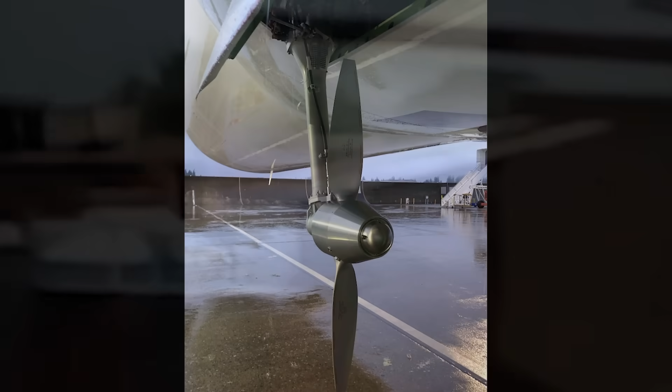With the Air India Flight 171 investigation, could inconsistencies with the RAT deployment in the government's investigation preliminary report actually exonerate the pilots from pilot error or deliberate downing of the aircraft?

Now, in order to make sure that all of the facts and figures and ideas and hypotheses all stay within the official timestamps of the AAIB, the investigative body, I want to introduce you here to the concept of the sacred timeline, which I kind of got from Marvel's Loki. And if you remember there, Loki worked for the TVA. That's the Time Variance Authority. And it's their job to make sure that nobody messes with this timeline or tries to screw anything up.

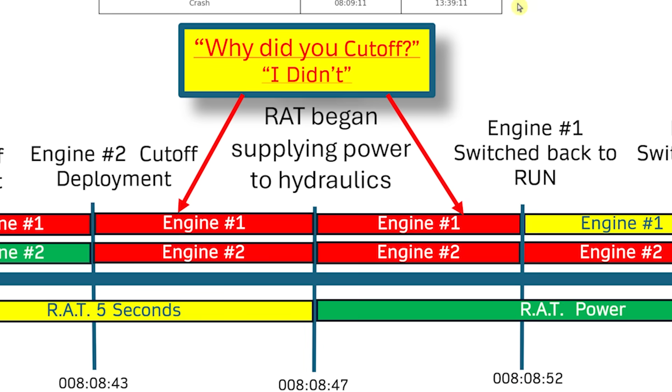Okay, so I made this chart here for you, and this is based off of the sacred timeline. Now, if you remember on my last video, I had this chart that I used, where I extracted all of these timestamps out of the AAIB's official preliminary report. So these are all of the times that everything happened. Now I want to lay it out visually for you onto the sacred timeline where there can be no errors, and I want to show you exactly what happened with the RAT and why some people think this is wrong and why they're questioning the preliminary report from India's AAIB, which is supposed to be the official source.

Here at the very beginning, we have liftoff. The nose is up, and that happens at 8:08:39. And you can see both engine 1 and 2 are working just fine. They're green, so there's no problem there. And there's no sign of trouble until 3 seconds after liftoff. We're at 8:08:42, when two things happen here. A, you have engine 1 cut off, and B, the RAT deploys.

So the RAT, for those of you who don't know, is the Ram Air Turbine. That's the little propeller generator that pops out of the bottom of the airplane. So it uses wind to generate power. At that same time is when both of these occurred, right? So now engine 1 is dead, engine 2 is still running. 1 second later, at 8:08:43, is when engine 2 cuts off. So now they're both off here. But remember, the RAT has deployed right here automatically. The plane automatically does it, just boom, starts right here.

And then time goes by, and the next update we have is right here at 8:08:47. So this is 5 seconds after the engine cut off and the RAT deployed. And it says in the report that the RAT began supplying power to the hydraulics at this point in time. So it took 5 seconds for the RAT to turn green, and it's now giving power to the hydraulics, okay? And some people have a point of contention with this, so we're going to talk about this in a second, but I want to talk about the rest of this.

So there was the discussion that says, why did you cut off? And the other pilot says, I didn't. We don't know when it happened, but it must have happened somewhere in between these two points in time. That would be when somebody would notice it, once both engines are dead. And then you can see right here, engine number 1 was switched back to run at 8:08:52. So a lot of people are also asking, why is there almost 10 seconds between the time that the engines died and somebody switched them back to run?

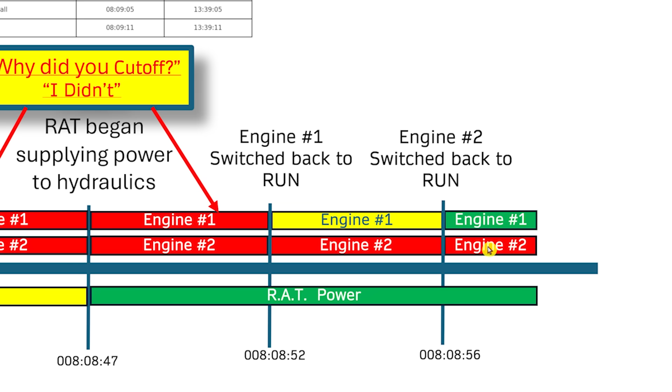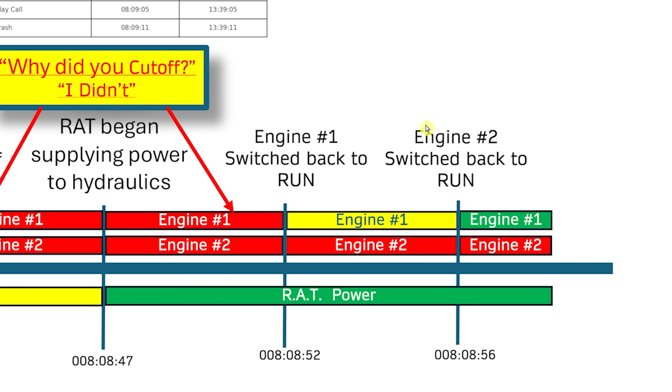And so now, once that is turned back to run, engine 1 is starting to fire back up, and we don't know how long it takes. It doesn't specify in the report, so I'm just showing in this zone on the timeline that engine 1 is coming back online. Engine 2 still has not reversed its deceleration, and at this point both engines are fired up once engine number 2 is switched back to run. But engine 2 just didn't recover in time before the crash happened about 15 seconds or so later. So here is everything that happened visually on our sacred timeline.

There is just one problem with this, folks, and let me show you what that is. Okay, so the problem stems from the fact that in the AAIB preliminary report, the actual reported time for the RAT to become active in supplying power is 5 seconds. But yet the aviation experts out there are all saying, no, not so fast.

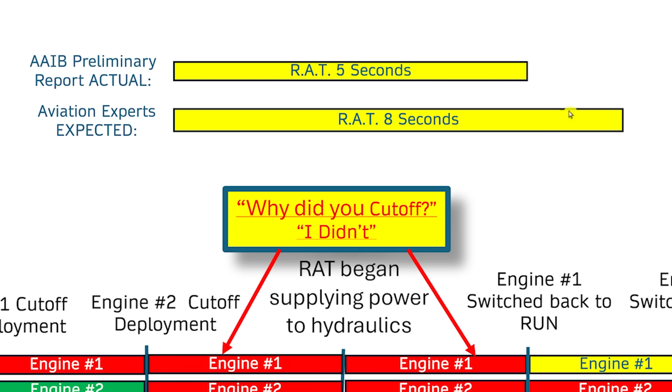This is supposed to take 8 seconds. There's something wrong. So they're automatically becoming conspiracy theorists, and they're saying, well, the government's report is wrong and it's jumping to conclusions and blah, blah, blah. And they're saying all this. And this really has happened with human beings since the beginning of time. If they don't agree with what the Bible says, they're going to say the Bible's wrong.

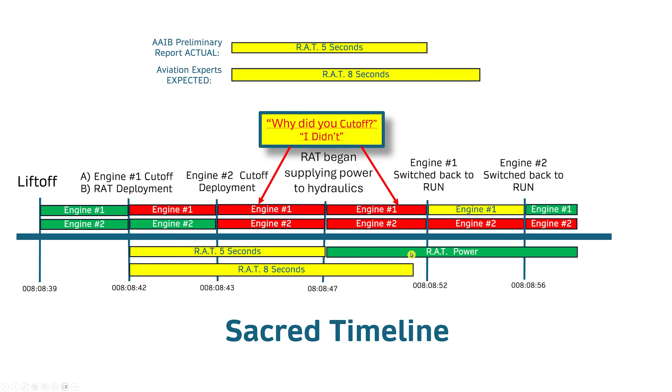So if you come down here and look at the sacred timeline of what's really going on, let me show you visually what's really happening. So here's where the RAT deployed right here, 3 seconds after liftoff, and here's where it's now supplying power right here. So if you look at what the aviation experts are saying and say, hey, it's really 8 seconds, then this is what it really should be. But the problem is it now takes that deployment and power time and it moves it 3 seconds this way, so that either this is wrong or something's wrong.

But if we can't touch the sacred timeline, we have to leave that there, then something's about to happen here. So watch this, and watch this left side, what happens. So if we move this 8-second time slot here to align with the sacred timeline on the right side over here, look what happened to the left side. It moved the left side over 3 seconds now. So now the RAT didn't really deploy 3 seconds after liftoff. The RAT deployed right at liftoff.

That's what they're saying. And I don't even know if that's really possible, because I thought you had to be in the air at least a few seconds or something because of the sensors that tell you when you're on the ground versus when you're in the air, because you don't want that thing deploying when it's on the ground. So do you see what they're saying here? So the people that want to espouse this particular scenario here is that, well, the RAT deployed back here because there was already a problem with the engines.

So what they are saying is that the pilots didn't commit a pilot error, and the pilots did not do this intentionally. What happened was they cut off the engine here. That's why the switch was cut off. It wasn't done intentionally or by error. They said they cut it off because the pilots saw that the RAT had already deployed and that maybe they were getting sensors already. Now, that's a big if, because nothing in the report says the pilots noticed any sensors or that there were any sensor problems.

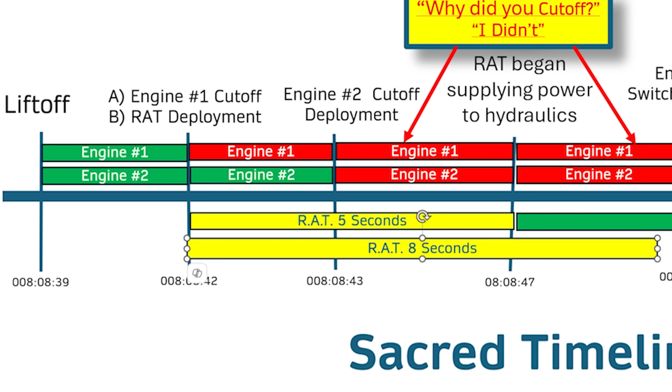And remember, it's the computer that does it automatically. So the very nanosecond that the computer detects something is wrong at this point, the computer will trigger the RAT to automatically deploy before any human being could even reach the button to do it himself. So what it's really boiling down to here is, does it take the RAT 5 seconds to start supplying power? Or does it take it 8 seconds to start supplying power?

And this, I think, is really stemming from everybody out there. Even all the experts and the pilots are all saying the same thing, that it takes 8 seconds. But I'm saying, prove it to me. Find me one Boeing document, directly from Boeing, not paraphrased from somebody else, but on Boeing stationery, that says how long the Ram Air Turbine takes to deploy.

Does it take 5 seconds? Does it take 8 seconds? Could it take longer? Could it take shorter? Well, we don't know. Remember, let's just assume it's an advertised number. It might say on the spec sheet it takes up to 8 seconds. But anyway, I have another reason for you why it may have turned on so quickly.

Check this out. So this is a little chart that I made to show you what would happen with the hydraulic pressure as it cuts off. Let's say right here at T equals 0 is when the engine shuts off. Your pressure doesn't just instantly drop to 0. It goes on this curve, but the pressure is going to start dropping over a few seconds, and it might take 10 seconds for it to get all the way down to 0.

And so let's say that this right here is when the RAT was deployed, right back here, because remember, it happened at the same time that the engine shuts off, right? So the pressure's dropping, pressure's dropping, pressure's dropping. Meanwhile, the RAT is kind of powering up, and boom, right here at this time, 5 seconds later, is when the RAT is now activated at this point in time.

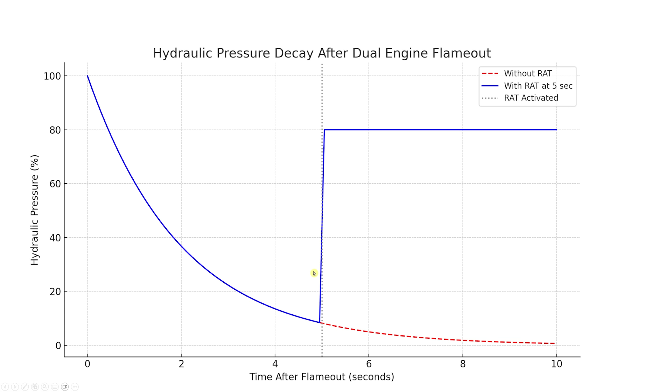So hopefully this explains to you at least one good, clear reason as to how in the world the RAT could have got this thing back up to pressure so quickly. And we're only talking a 3-second difference anyway, so that's not too far off of what everybody thinks the number should be.

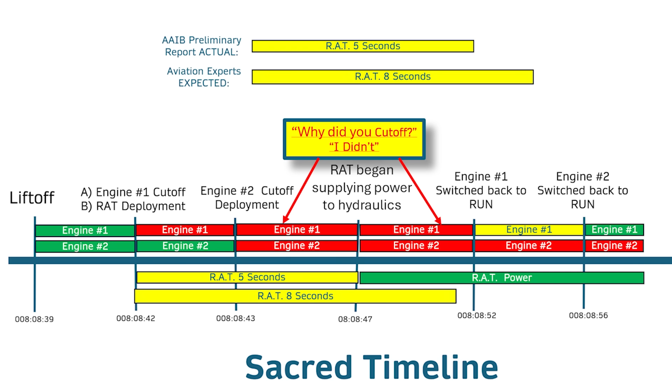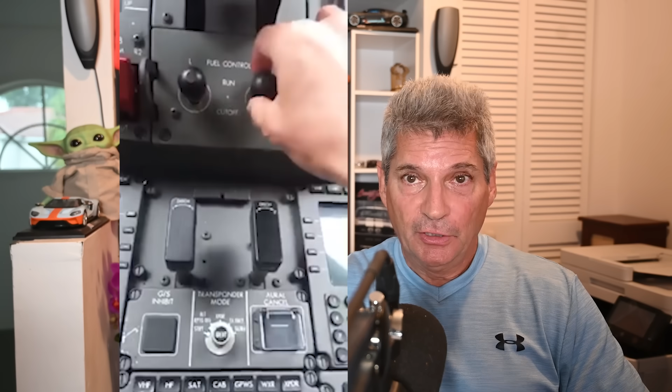If you want to protect the pilot and say, look, the pilot cut off the engine here because there was already a pre-existing condition happening over here, that could make sense. However, here's where the problem comes in: from this point here to this point here, it wouldn't take 10 seconds. And the reason for this, and you've heard many pilots say this already, is when you have to cut off an engine in flight, you don't go to cut off and then wait forever and forever and forever. You go from cut off like this, and then you go right back to run again in order to reset the engine.

And that's what automatically restarts it. Remember, the FADEC has taken control of everything from the minute you put it back on run. It goes, okay, let me start the sequence, and I'll get the engine back up and running in no time. It's not a sequence that takes 10 seconds. You don't sit there and wait a little bit and then go, let's put it back up. So that's why this doesn't line up to that theory at all.

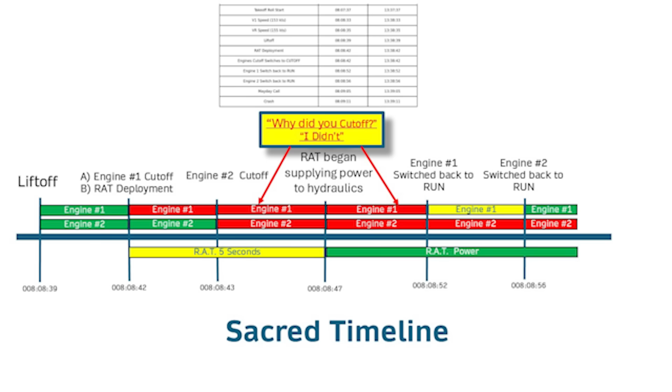What we see here on the sacred timeline lines up more to the theory of somebody moved a switch and the other pilot said, why did you move that switch?

And then here is where they're talking about, on the next page, the RAT automatic deployment. It deploys automatically if any of the following occur: both engines fail, all three hydraulic systems are low, or the loss of all electric power to the captain's and first officer's flight instruments, loss of all four of the EMPs and the faults in the flight control system occur on approach, or a loss of all four EMPs and the engine fails on takeoff or landing.

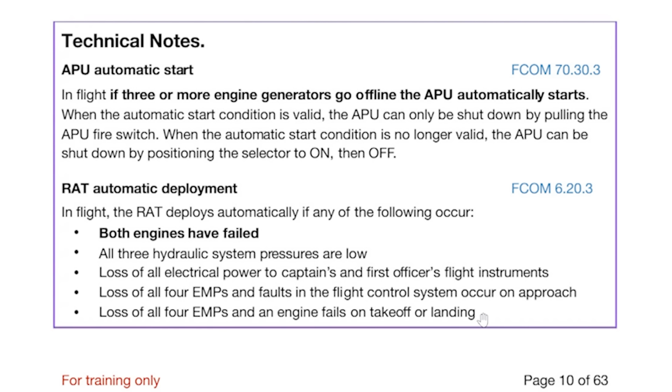We can see in theory, now we don't know what that time frame is, but obviously both engines were working just fine at takeoff. As far as we know, the plane got up to 180 knots and everything seemed textbook and normal there. If you can find a better scenario, give it to me. But so far, these other scenarios that are offered up don't seem to line up to that sacred timeline.

Now, hopefully by now, all you folks out there know the rules of the sacred timeline, because even Loki knows those rules. And what do those rules say? The rules say to be responsible and don't ruin the sacred timeline.

So this means stop trying to change the timestamps in the preliminary report, because you can pretty much bet they've checked those out, they've vetted them, they've looked them over a number of times, and those timestamps are probably correct. Because if you can't trust those, then how can you trust any air crash report that's ever been done by anybody? And remember, these guys are all doing it to the same international standards.

Unless they issue a correction, you can't correct the AAIB preliminary report. You can't correct those timestamps. You can't force scenarios in there that aren't really happening.

Now, there's another problem that people are bringing up, but you can see that they're wrong because people just seem to have a problem parsing the English language. Here in the preliminary report, everybody seems to keep focusing on this almost useless piece of information about this FAA Special Airworthiness Information Bulletin, where it said that the fuel control switches were installed without the locking feature.

But remember, this was only reported on model 737 airplanes, but they suggested that all the models be looked at, a whole bunch of different models, because they all use a similar, but again, not the same switch, like I pointed out on the last video. And everybody keeps focusing on this.

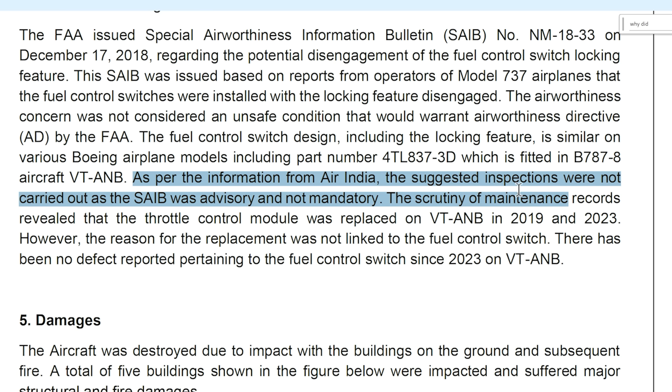As per the information from Air India, the suggested inspections were not carried out as the SAIB was advisory and not mandatory. So right off the bat, everybody went on the attack and they go, oh, it's those cutoff switches. They're bad. They didn't check them. They're bad. Boeing's this, Boeing that.

Because everybody just wants to blame Boeing, or they just want to blame Air India, but they don't want to blame the pilots. They don't want to even give a hint or even let loose in their brain and have a little openness and maybe consider that maybe there was a pilot error or a pilot sabotage. Because God forbid it, that could never happen.

We're in India, we're the best pilots in the world, and we do everything to the book, and we're professional and all of this other stuff, right? So people just don't want to come to terms with it, so they want to blame everything else. So that's why they started going after Boeing, saying, well, this was a Boeing problem or this was an Air India problem.

But this is what they didn't look at. They didn't look at this part right here. Otherwise, they wouldn't have made those ridiculous statements.

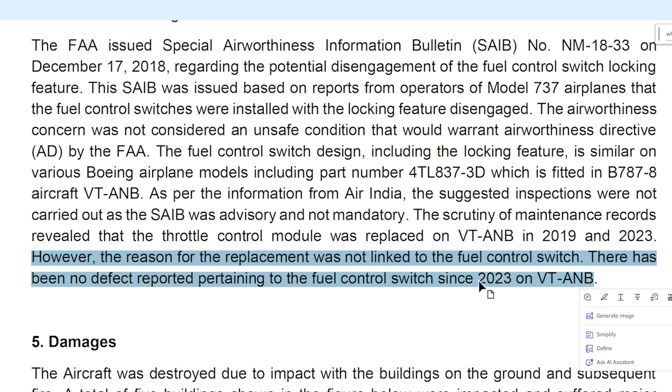The scrutiny of maintenance records revealed that the throttle control module was replaced on this airplane in 2019 and in 2023. However, the reason for the replacement was not linked to the fuel control switch, and there has been no defect reported pertaining to the fuel control switch since 2023 on this. So they replaced in 2023 last, and there has been no problems with it or complaints or anything.

So this means you have a lot of people running around half-cocked out there, pretty much lying, saying that Air India never looked at this problem here on that airplane. Well, they've replaced the module twice.

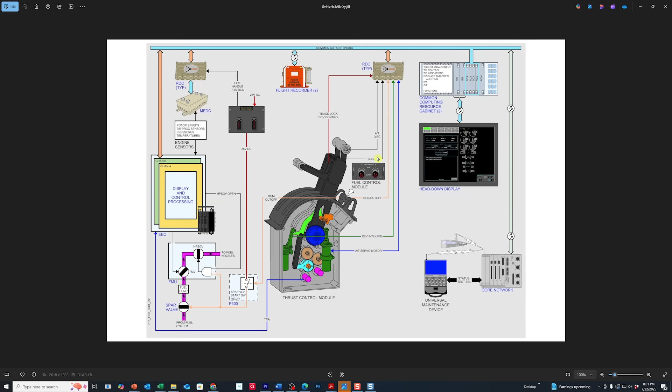Now, let me show you what this module is. So this is their entire system here, and this is the thrust control module. It's the entire setup, including the two fuel cutoff switches here. So this entire module was replaced in 2019 and in 2023.

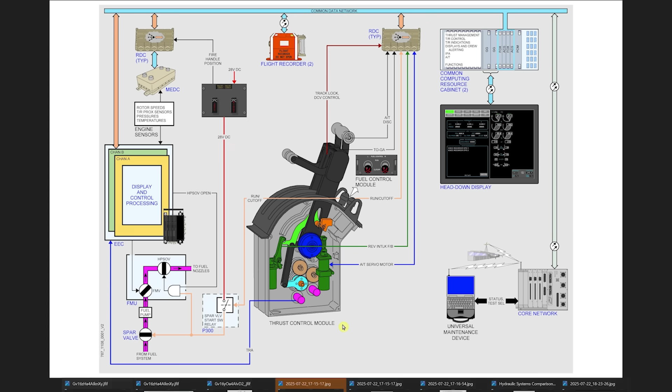So they could not possibly have whatever problem switches they thought that existed years ago back in 2018, because the system has been updated twice since then, presumably to the latest model of the part number for this. So it wouldn't even come into question that there's a problem with the fuel control switches. So I think everybody just needs to lay off on this whole theory that there was something wrong with these switches. It appears that the switches did their job, and it appears that the engines did their job as well.

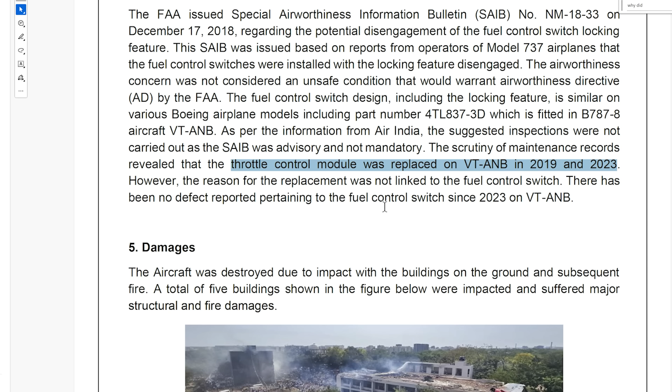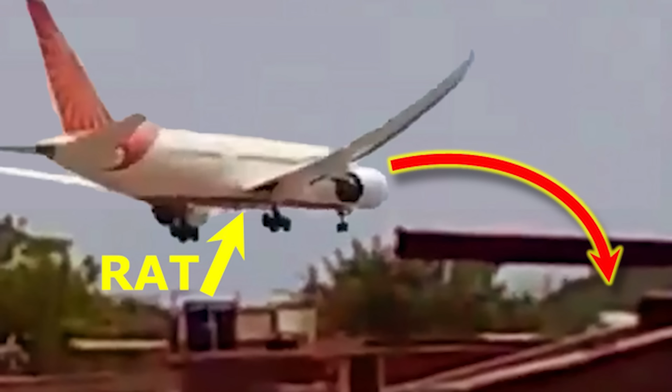Because they all have an agenda. Everybody seems to have an agenda here. Some people just want to blame Boeing at all costs, no matter what. Some people just want to blame Air India at all costs, no matter what. Some people just want to blame the pilots at all costs, no matter what. I'm here more for the truth, not for nonsense. I refuse to tolerate when I see people doing stuff like this.

Now here's another thing a lot of people might not be considering, because I don't think people realize the difference between the Boeing 787 and all of its previous models. What happens here with the hydraulics on the older models, those are all engine-driven pumps, you see.

So those can take a lot longer to power back up. And I would think even if you have the RAT for the hydraulic power output, who knows how long it really takes those systems to get back up. It's not very clear here.

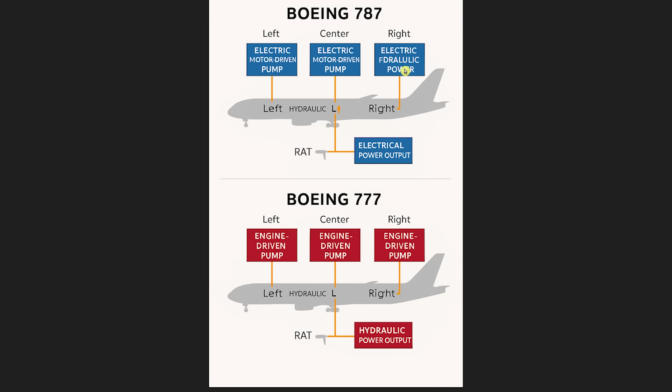Boeing 787, these are electric motor-driven pumps. They don't rely on the engine operating, so these can come right up fairly quickly. That's where the RAT is supplying that electrical power to those electric motor-driven pumps, so the hydraulics come up faster.

So what I'm saying here is on flight AI 171, both engines cut out at 42 to 43. The RAT began supplying hydraulic power 5 seconds later at 8:47. Therefore, without the RAT, the aircraft would have had a window of roughly 5 to 8 seconds of diminishing hydraulic response. This aligns with pilot reports and simulations, showing initial loss of control authority before the RAT catches that system and brings it back.

And if you look at some of the other aircraft, the Airbus A320, it says here you would have 8 to 10 seconds if the RAT did not deploy, is how long it would take to get down to zero. The Boeing 767 and 777 would take 6 to 8 seconds. And then the Boeing 787 could take 5 to 8 seconds.

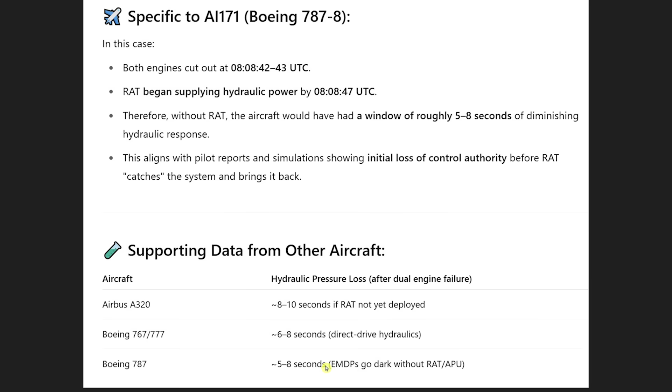And remember, because of that initial uproar over that preliminary report, the Indian government last week told all the airlines to go out and check these stupid switches. So here's what happened.

Just yesterday we see a story: Air India says no issues in the locking mechanism of fuel control switches in the Boeing fleet. So they've checked all of theirs. It says right here, they had completed precautionary inspections on the locking mechanism of the fuel control switches for select Boeing aircraft with no issues found.

And then another conspiracy theory, ironically put forward by the pilots union, is that the AAIB is jumping to conclusions, which they're not. They didn't say anybody did anything. They only reported what was in the data recorder. And if you don't like the numbers in the recorder, if you don't like what it says, that's too bad, because that's what happened. Flight data recorders don't lie, they tell the truth. So there weren't any conclusions jumped to.

But of course some of the conspiracy theory people out there are saying, well, this is just because these big pockets of Air India are trying to control the story and move it to the pilots, to take the problem off of them. Well, that's a stupid story, and I think you and I can figure that out already, right?

Because it doesn't matter if the pilots made pilot error or if the pilots did this deliberately, it's Air India's fault, right? They're the ones who are liable anyway, and they're going to get their shirts sued off their backs no matter what. So putting the blame on the pilots does not shift the blame from Air India, because Air India is the pilots, basically. Duh. So why people make really uninformed comments like that is just unbelievable.